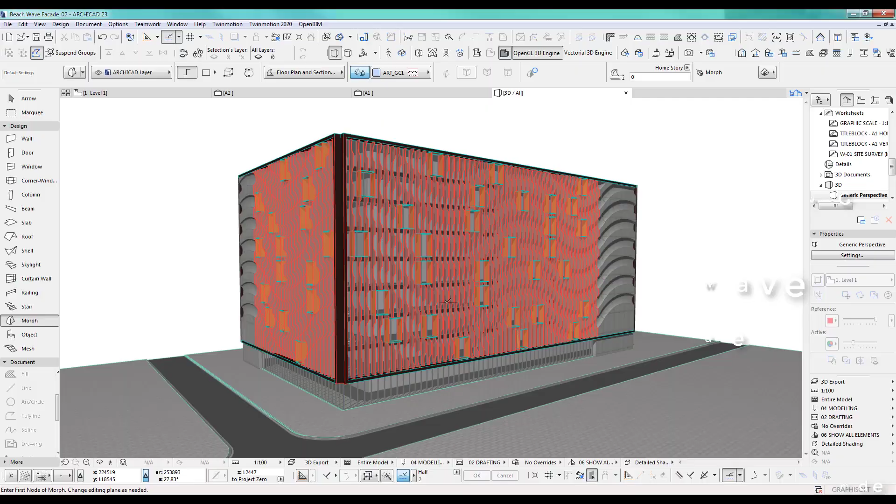Okay, so I've got my base building here. Let's have a look in 3D. So that's very simple - it's an office building, and what I did is I made a frame around, just used some columns and beams for those ones and a bit of concrete, and the rest you can see is just windows.

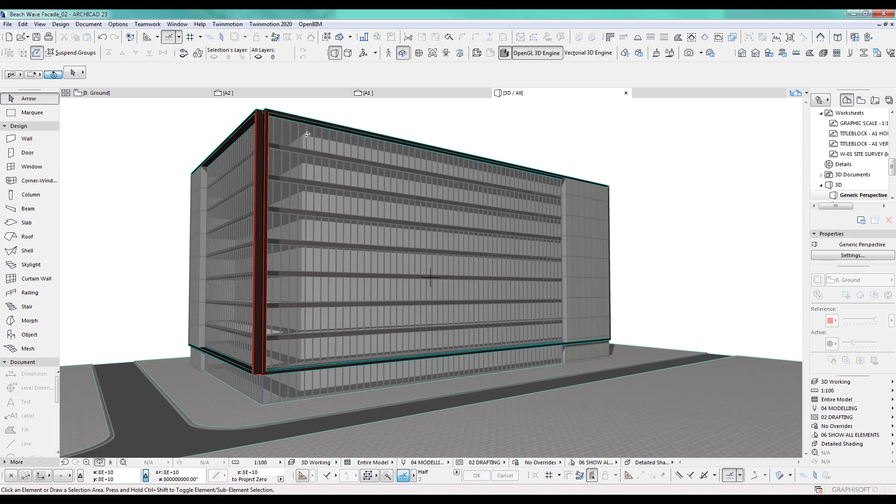Great, so if I now go and start doing my blades, which are vertical down, I will use columns for this. So let's get back to our 2D drawing, ground floor, and I like to start in level 1 because if I go to my elevation, you see ground floor level 1, I want to start the blades up here.

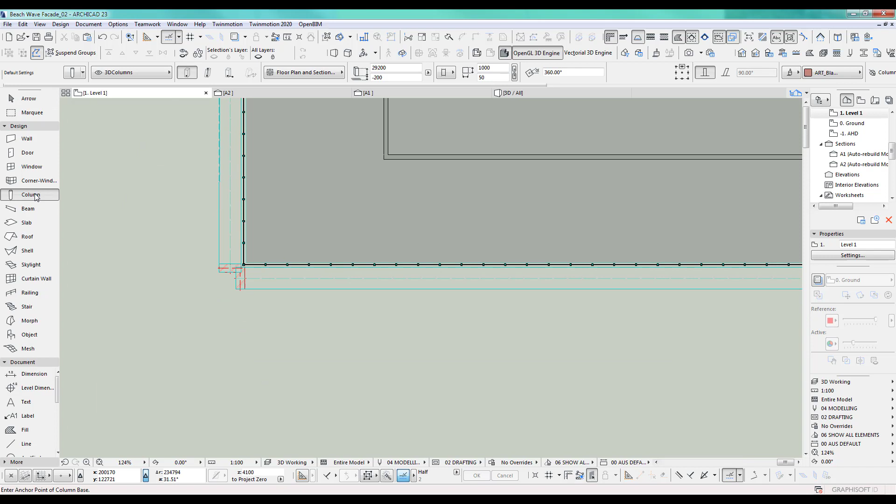So go back and we just place the first blade. For this I go and open the column tool. I got some very simple settings - it's 1 meter in length, 50 wide, and I added just material, and I'll put this on 3D columns.

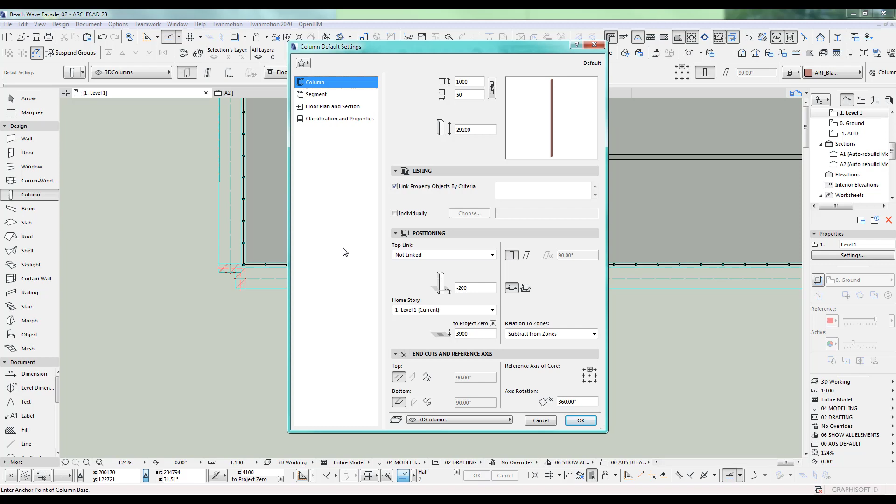The height at the moment, don't worry, we'll do this in 3D, and also where we place it in regards to the RL level. Click OK and just place it out here, and then we take this and we move it closer to our window frames.

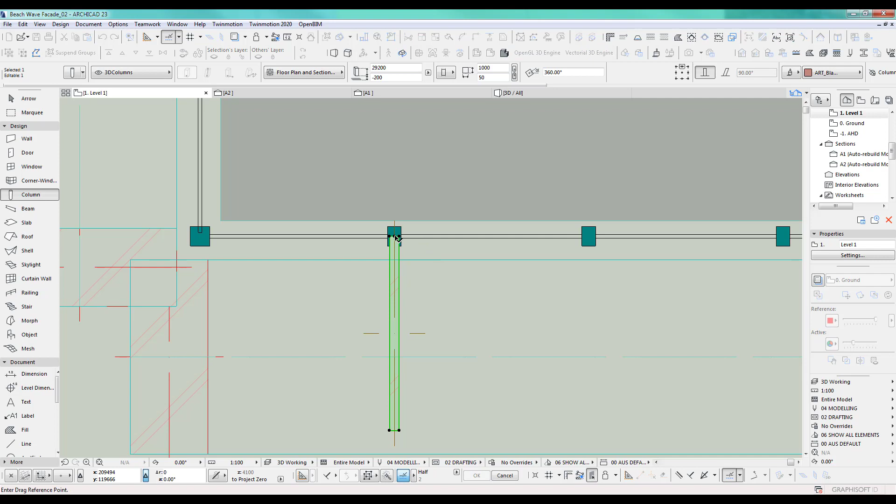So I drag this, there we go, take the middle, and I want to put it in the middle of the frame. There we go, and now we have to move it out again. So I drag it out to there, and let me check in 3D if that is correct.

All right, let's zoom in, move around a bit. Yeah, that's good. And let's go up. Yeah, now look, the length fits, lucky because I've obviously tested this one before and that was just a default setting.

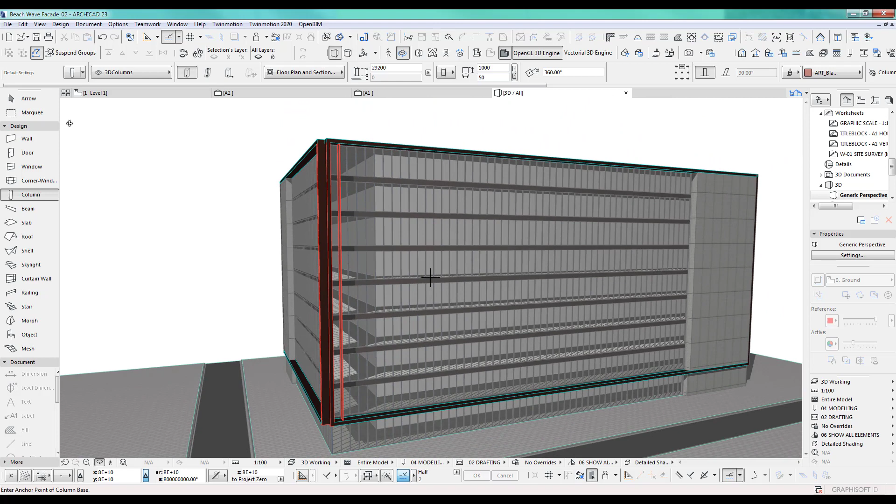But in your case, let's just say you have the column in there and it is just a little bit too small, and it sort of sits anywhere in here. Just drag them up and down to fit here the bottom, and you fit the top there. So I undo this step and I've got my first blade in.

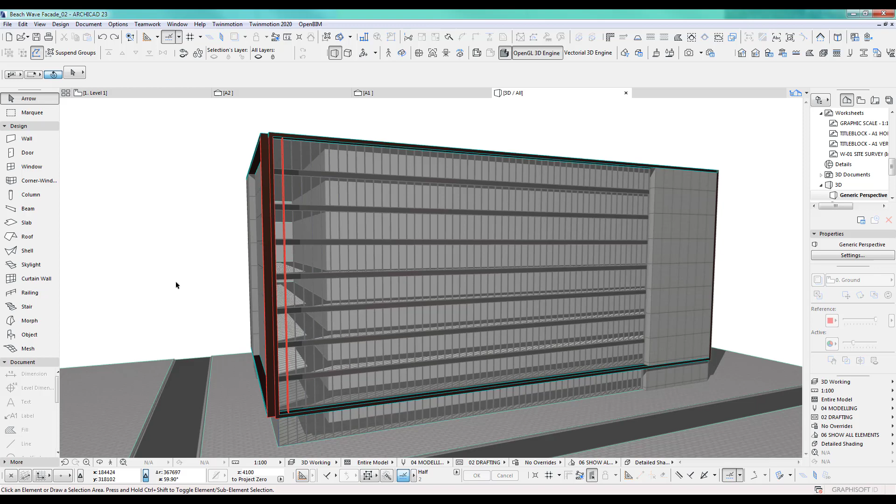Now let's just duplicate the blades this way. For this I'm going to my ground floor, and all you do is you select and we use the increment and spread tool because it's quite simple. I can just click OK, and I'm going in the middle here, from there to the middle there, click again, and now I can just spread them along.

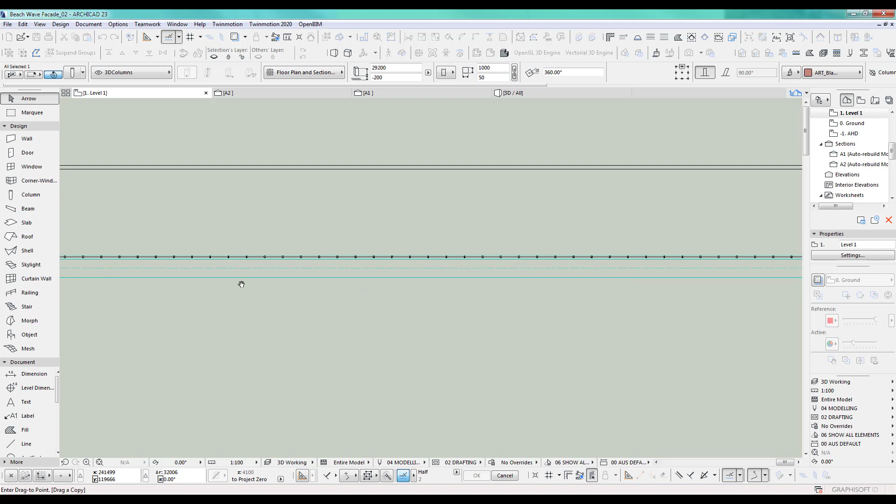Now I can see I should have shown the ground floor because I don't know exactly now where my concrete wall is starting at the bottom, but that's cool. Let's just do roughly here, and I will still select the last one and group them now. So they're grouped, and if I show now the ground floor, let's see how we did.

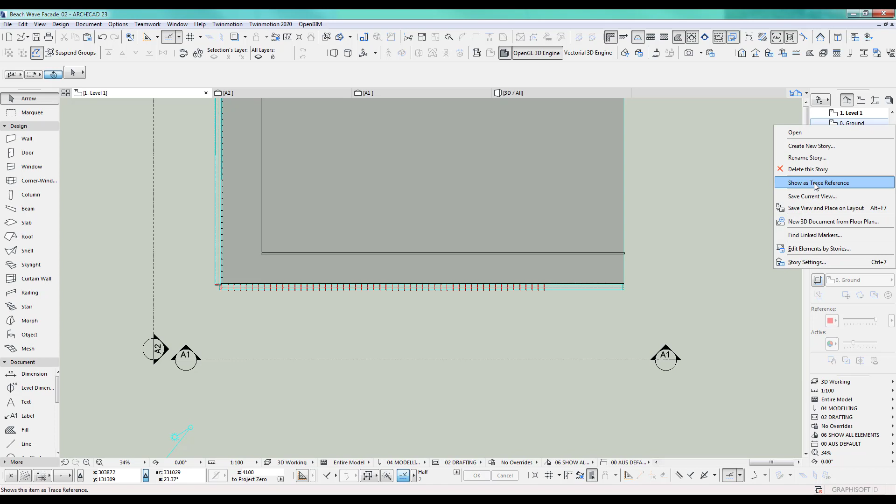Okay, oh, this is crazy, nice. This fits exactly. I don't even have to delete any blades or add any blades. Yes, sometimes you get lucky. All right, so we got those blades here. Let's do the same for the other side.

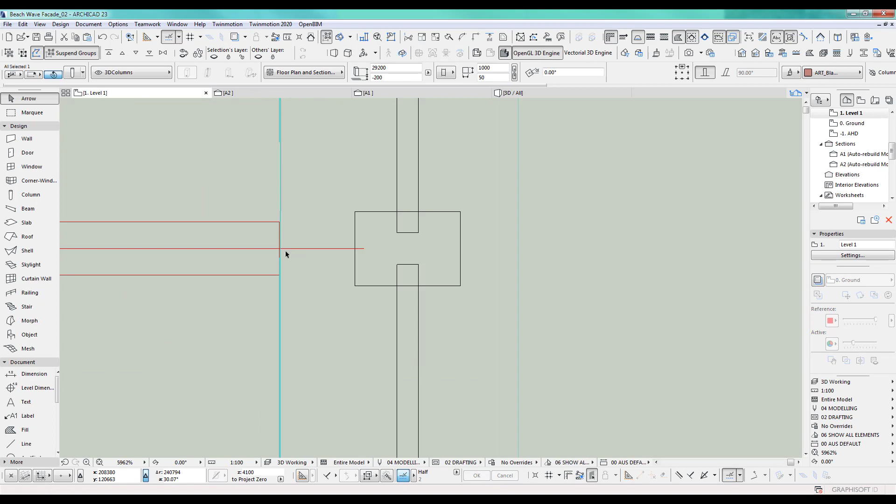Great, so we got the blades. Let's go and have a look in 3D how they look for now. Yeah, that looks exactly how I wanted it to look.

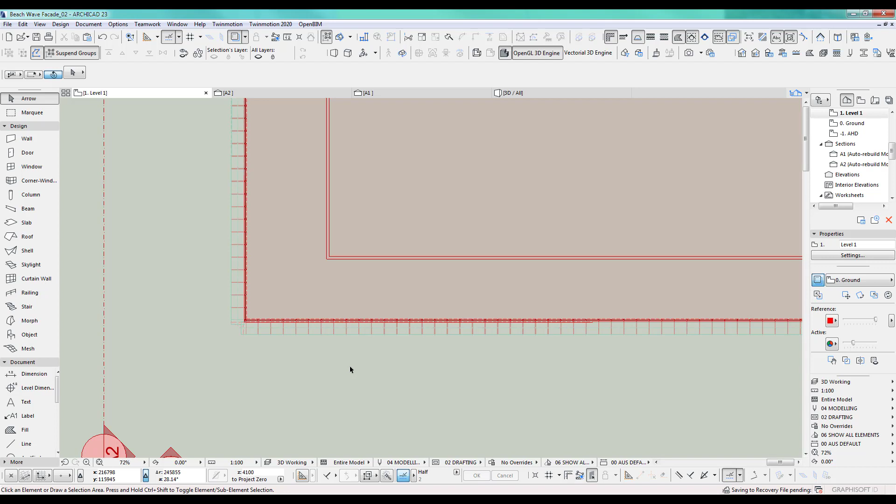The next bit is I like to add now the window sizes. Let's go back and we draw for these beams first. And what I do is, let's open the beam. I do 50 thickness and 1 meter in depth because 1 meter out and the other blades vertical are 50 - so that's the same settings really, but it's going horizontal. And for this one, I change the color to blade 01 and I put it on.

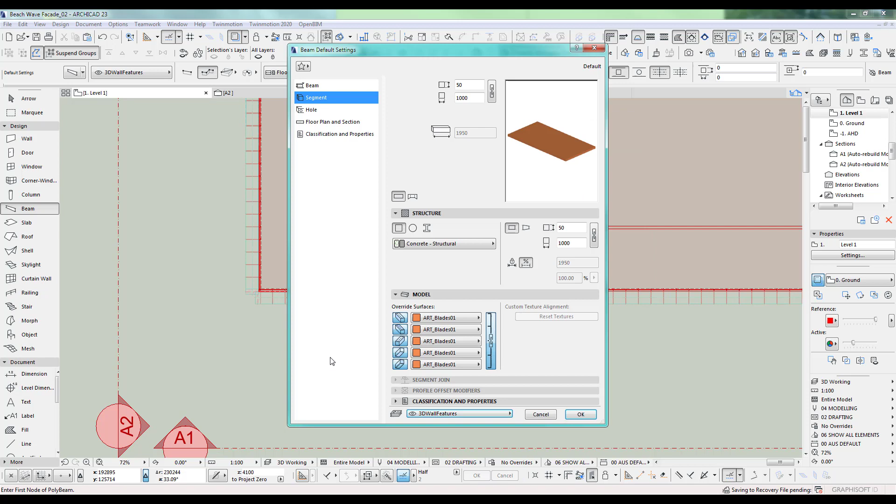Yeah, look, this is fine for that. I just need it on a different layer to the column. You will see later why. Wall features is fine, I'll leave it there. Click OK, and we draw our first blade.

This I want to go from there to there. Again, I haven't looked at the height, so let's have a look in 3D. I'll be in here somewhere. There we go, see, there it is. I should really have drawn it out here.

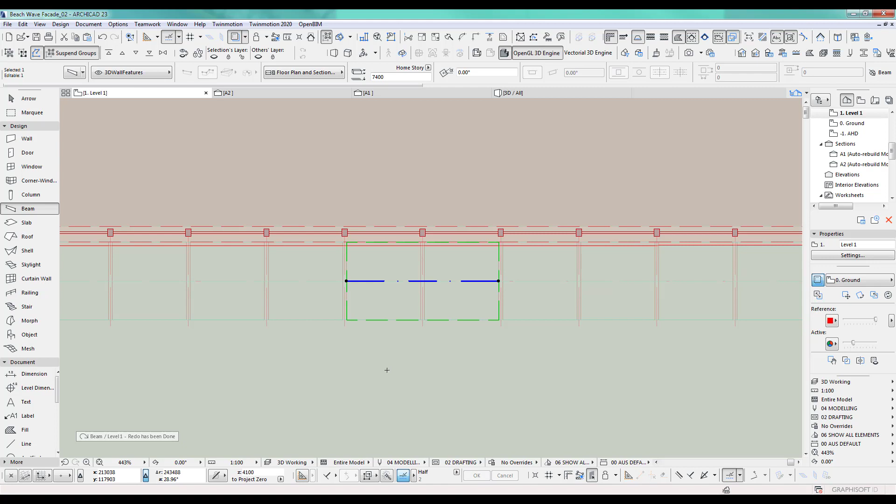So let's undo the step and redo. What happens is it will reselect it, so I know where it is. And I like to drag it out here on purpose, just really out here.

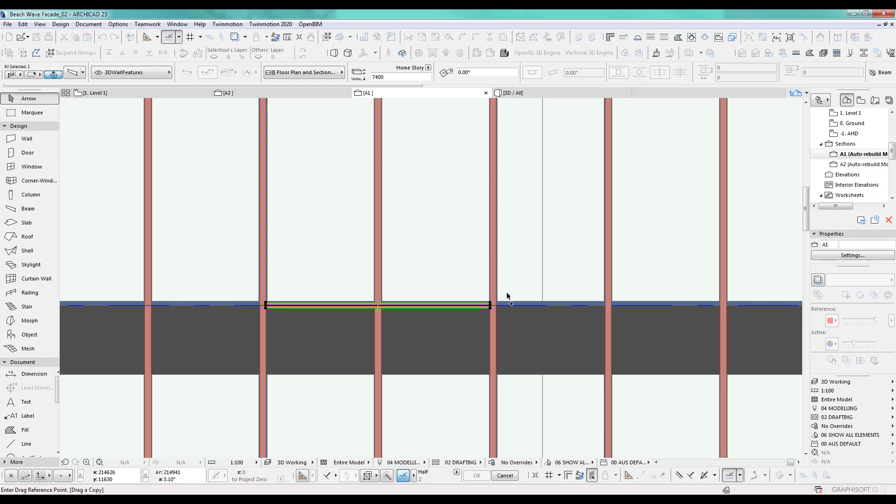Now I'm going to my elevation. Okay, so yes, there it is. What I want to do is here, I want to select this now and drag a copy, because in elevation it's quite easy done now. So I take it from here and I want to take it all the way to there.

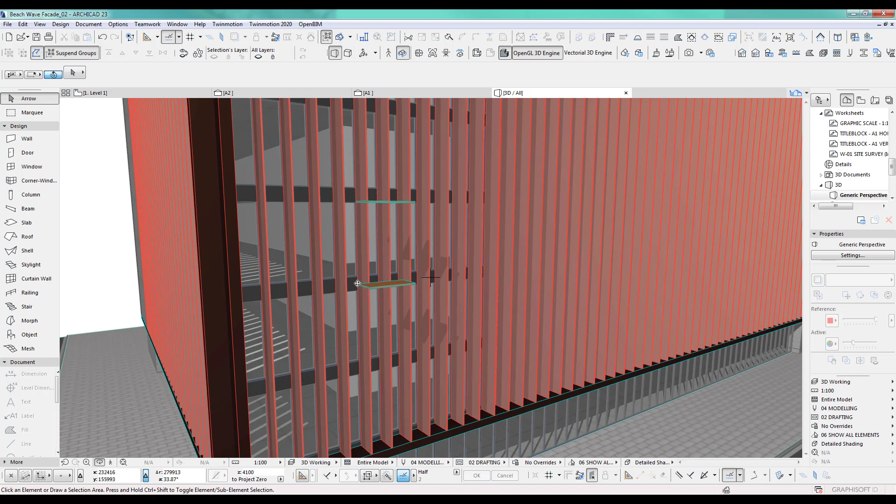Okay, so that's great. If I go back and look in 3D, we got this floating on here, which is fine. And I want to add some vertical blades. You will see why I do this, okay, so just be patient with me. I know I got vertical blades already here, but there's a reason I'm doing this again - this has to do with some of the solid element operation we will be doing.

Okay, so I go out here and let's just add a column again.

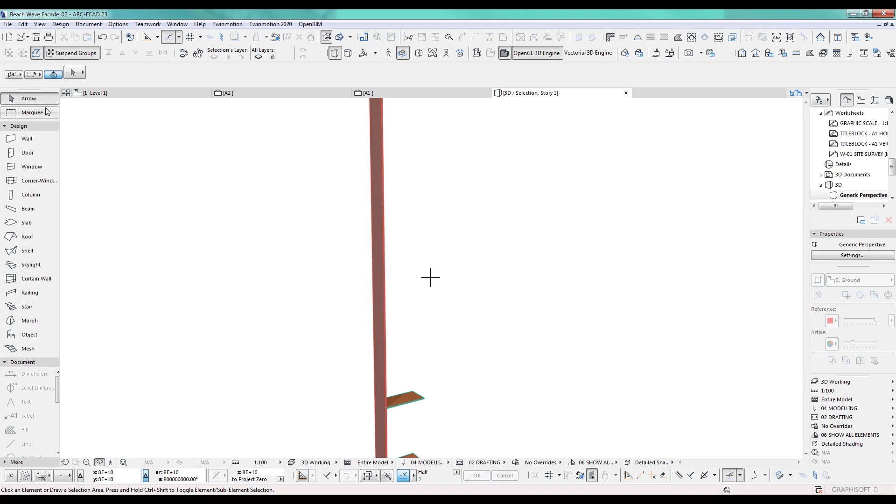Let's click them in and drag there. So they fit obviously exactly there. And just before I copy that, I want to change the height. So let's just go here and drag this down. Great, this is good. Now I want to change them also to blade 1, so they got the same color.

Now I can - okay, that disappeared. Let's go up and up again, down again. I lost it now. Great.

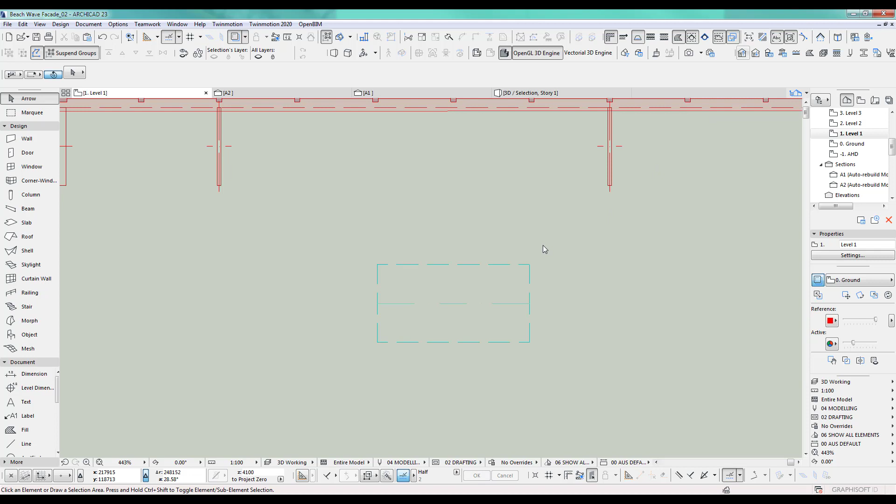Okay, let's go back into 3D. I didn't tell it to show on all levels. Let's have a quick look. Where are we here? Home story only. No, I want this on all stories. Okay, let's go back.

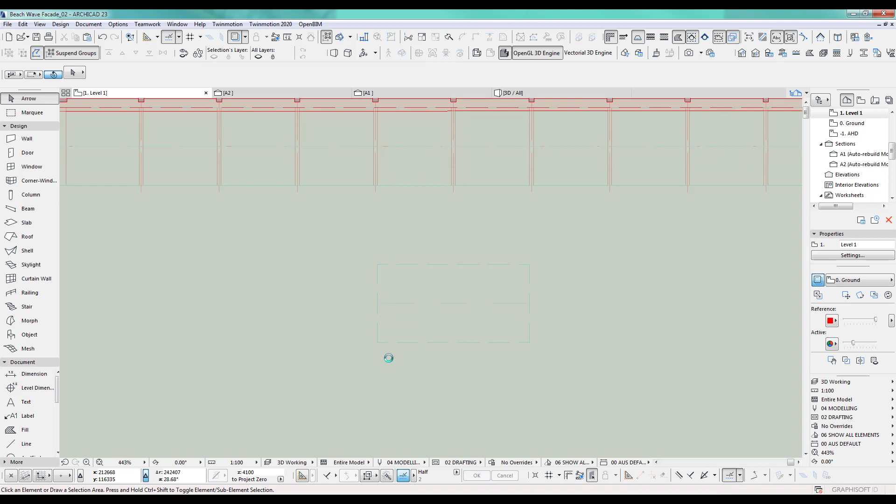Okay, that should turn up. Very interesting. Let's go up again. That's a bit odd, it says all stories.

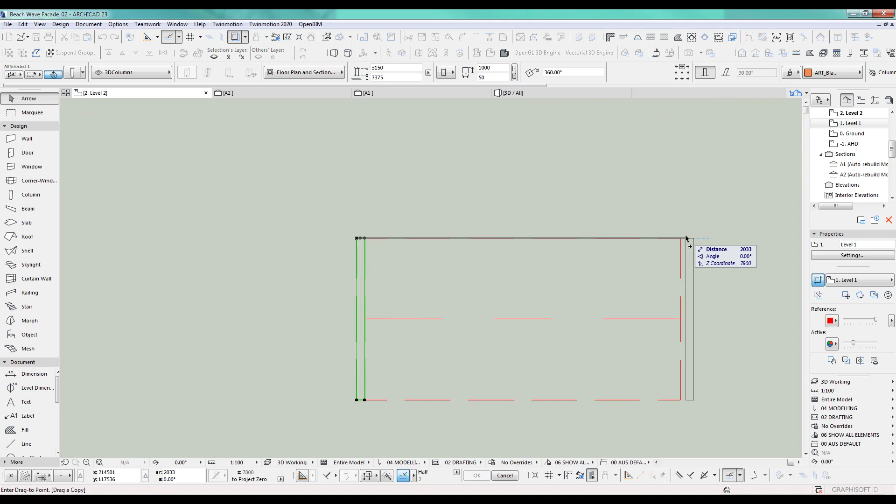Anyway, so what we do is now let's show them as trace reference, and I just drag a copy. Yeah, I'm sure there's some setting I didn't do correctly with the showing in 2D, but I'm sure you guys can figure this out.

So now I select them, go into 3D, make sure it's all selected. No, it's not - so obviously because they're not on the same floor. I'm getting there today.

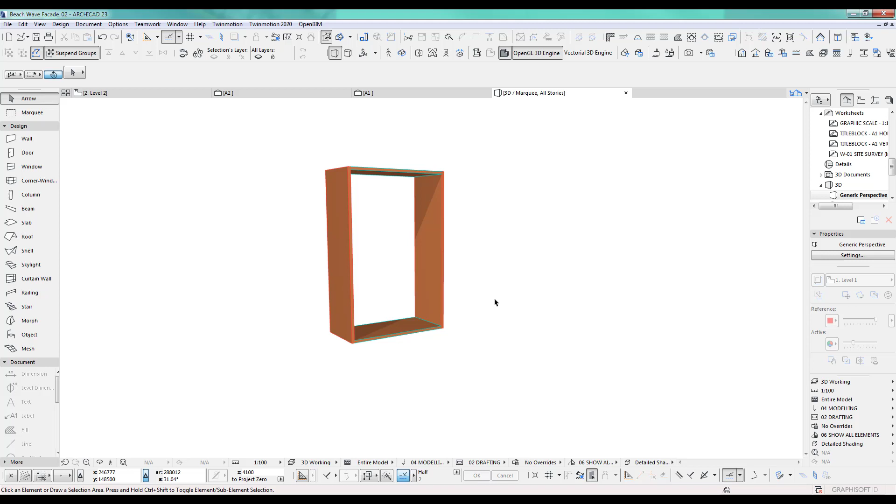All right, so take all this and we group this. Right, next step is quite an important step. What I do next is I want to draw with the slab exactly around this box. So create an extra box, and that box I will use for cutting.

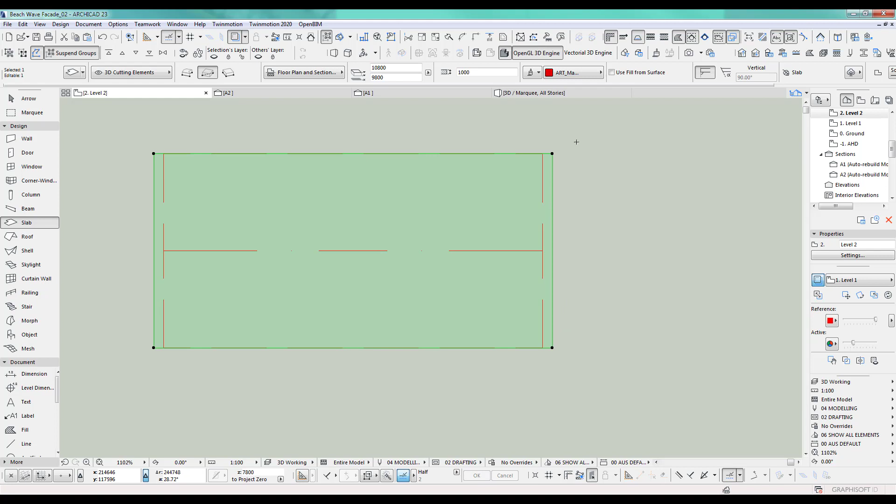So what we do is we take the slab, and again I just draw right along here. But for safety reasons with the cutting, what I do is extend this box now. Let me extend this by 1 - that'll do, distance 2. 2 is fine too, 1, 2. That's fine.

Okay, now in 3D I have to adjust this box obviously. So let's move this up, and we move this - well, extend this down. Now again, I want to extend this by 1 millimeter here.

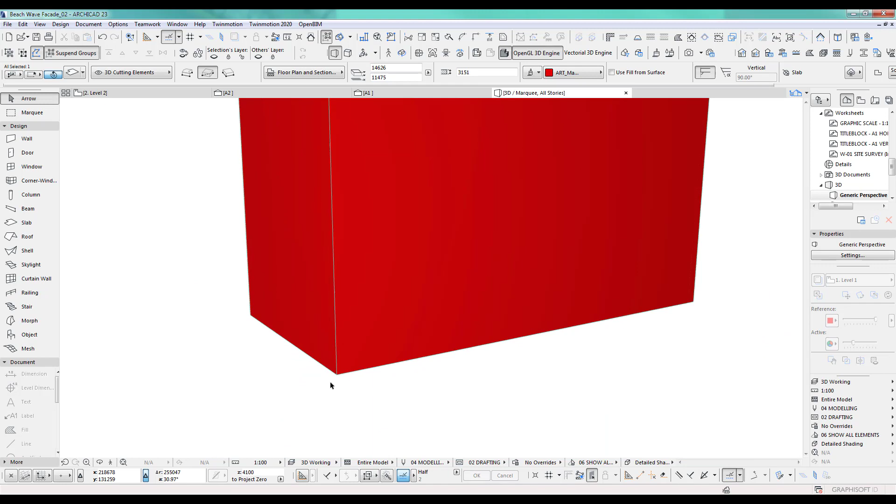So it's 3,150. So all you have to do is 3,151. Okay, so there is 1 millimeter above, and we go down here, do the same thing. So now we got 3,151, we do 3,152. Okay, so the whole box is now 1 millimeter outside your window blades.

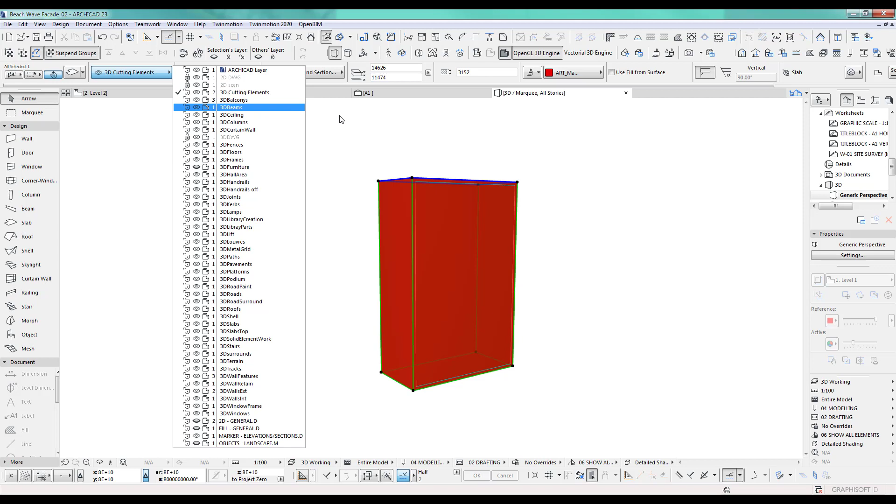Call them window blades, that's fine. This one here, material doesn't matter. See, I put them on a material called material off, and importantly, I put them on my cutting element layer. Great, so I've got this. Select everything and group again.

Okay, so if I go to my elevation now, let's see what we got. There we go. So we got this box, and this box now we will copy around randomly on this facade.

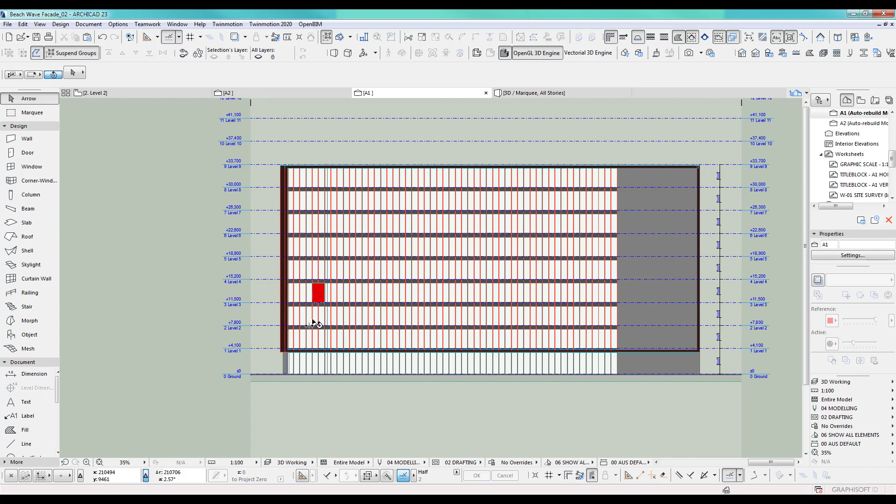So let me do this quickly. What you do is click, make sure the groups are not suspended because I want to move everything. So we zoom in a little bit.

And you can see now it is not really showing where I want it to. It's quite hard, so here's a little tip. You can go now and turn this off.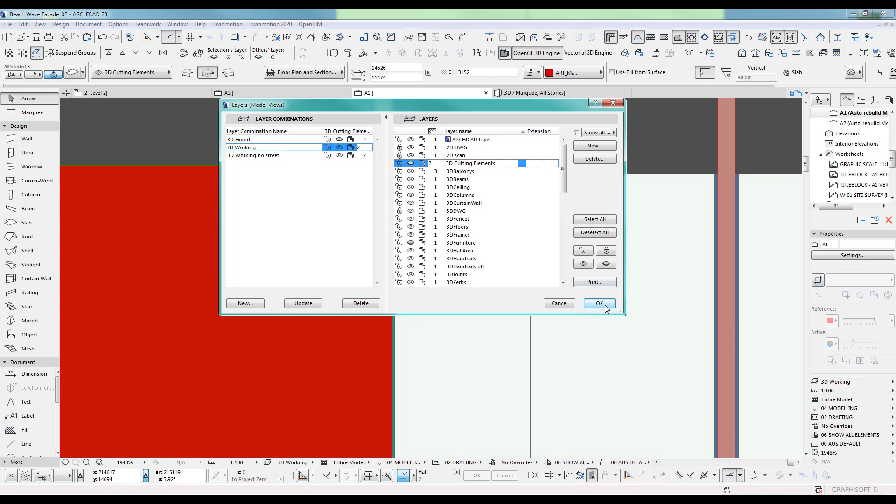Now even though the box is not shown, because it's grouped, it will copy the box. So let me select this now. See, I need to see this.

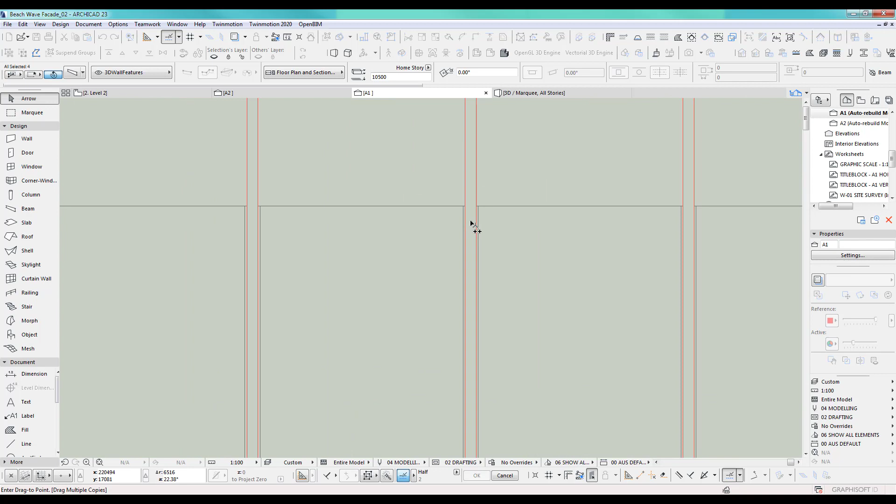Let's drag double plus, we drag copies around now. So go here, and wherever you go, make sure you zoom in, and you want to go to this corner. That's quite important that it all matches. See how it matches up on that side, and it will match up on this side with the blade. So that's important. Let me do a couple around here.

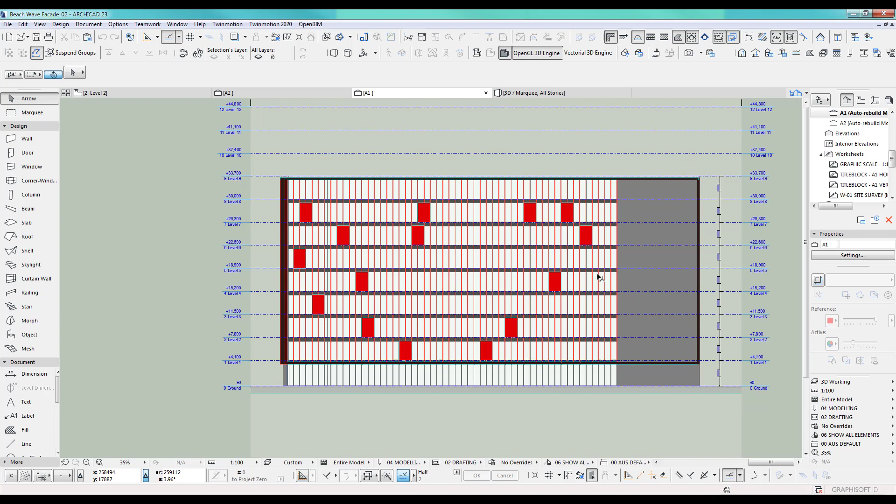Okay, now I'm not finished. It's a bit hard to see now. It's selected, that's okay, but let me put back the working layer. So that means I can see all my boxes. So there you go, it's not too bad, but I need a couple more maybe around here.

And some of them I want actually to go straight under. Okay, so let me do that now. So I'm going here, and again I will turn this layer off first and copy a couple more around.

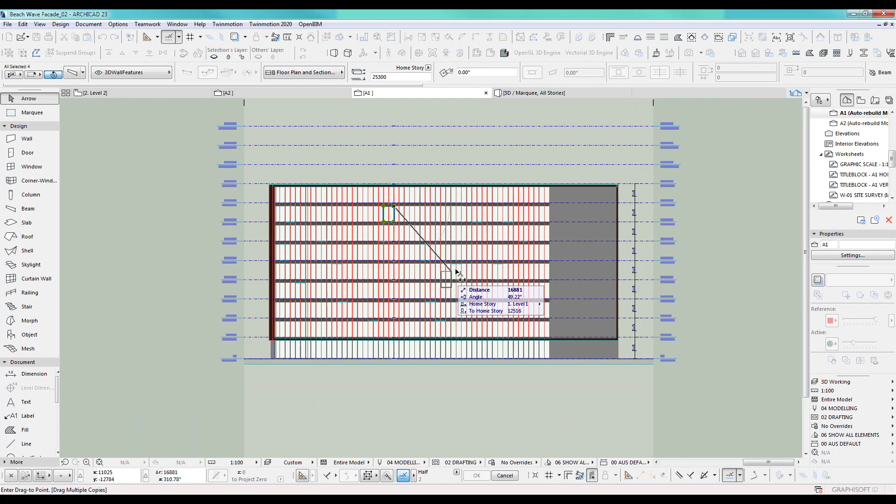Now it gets a bit hard to see, so let me do this, because you know what you have to do now. I go back to the working layer, and I will select this, and if I zoom in I can still select this one in here. I would think so - have a quick look.

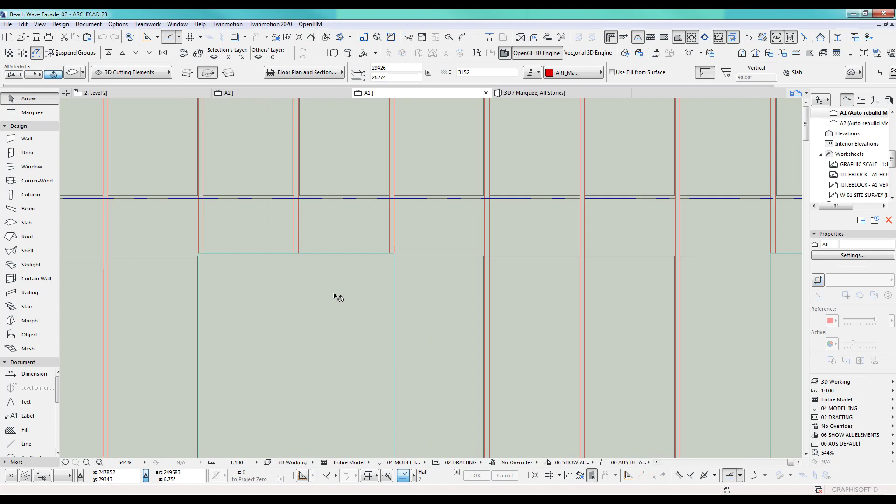No, I can't, but see, that doesn't matter. I'll show you what we do - we still start copying them, but all you do is zoom in, and you just pick this one here. See, there you go, pick this one.

Okay, I think this is pretty good. Escape. I quite like this.

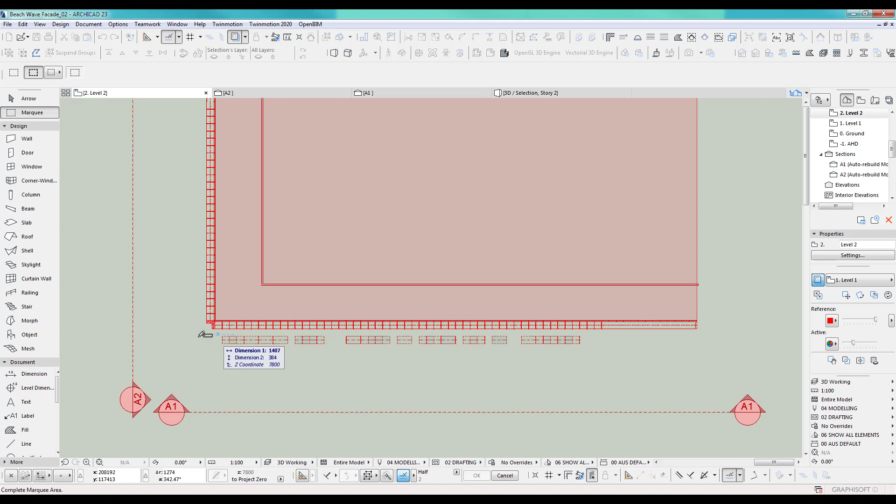Now we go back to our 2D drawing, and for this purpose of the tutorial, I really wouldn't mind copying them to that other side. So let's have a quick look. I think with the marquee tool I should be okay, so everything within the marquee tool should be mirrored and copied. Let's do this now, mirror copy, go there.

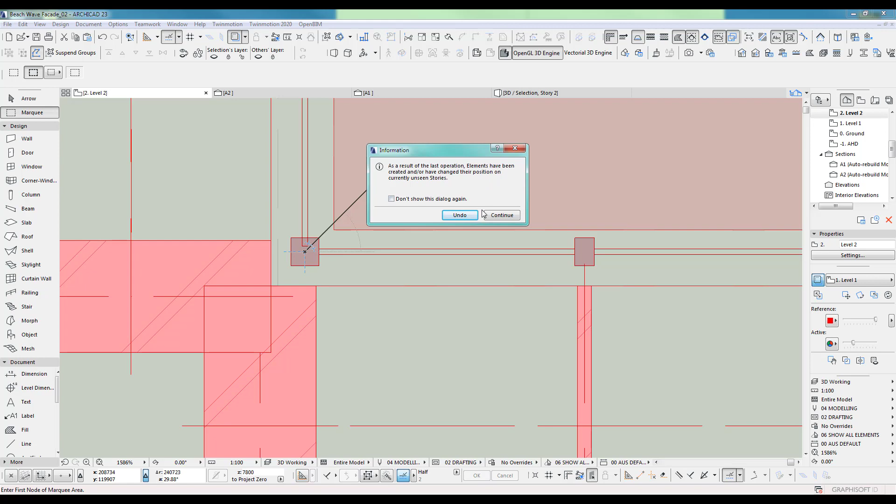Continue will ask me because some of the stuff is obviously in unseen stories, so I'll continue. Let's have a look. Yeah, there we go, that seemed to have worked fine. So everything within the marquee tool of all the different stories did copy mirror in this case. Let's have a quick look, yeah, see, there you go.

Now you see at the moment this looks mirrored, so to make sure that doesn't look exactly the same again, use the marquee tool, and I will just rotate this roughly from about here, and you go all the way around here. Let's have a look, yeah, so it doesn't look exactly the same.

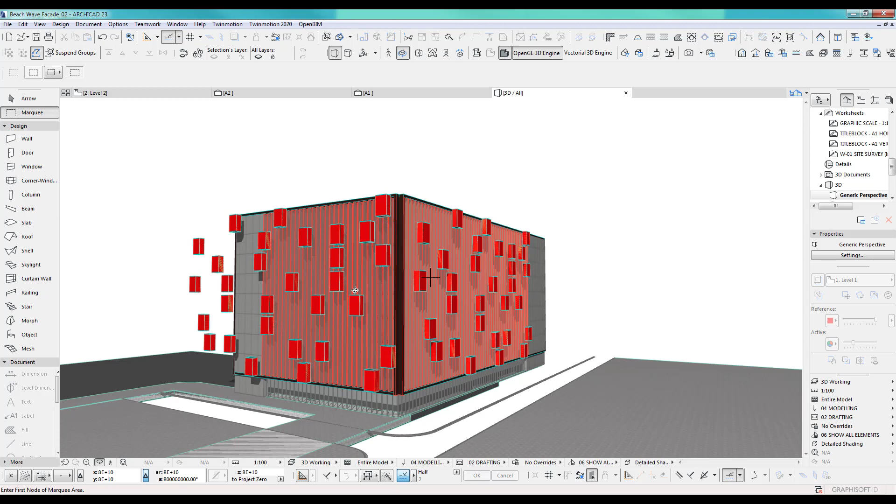I know it looks the same back here and back here, but because I will move it a little bit in a moment, it will be fine. So, 1, 2, yeah okay cool. So let me move this. Yeah I think that will do. So let me delete those.

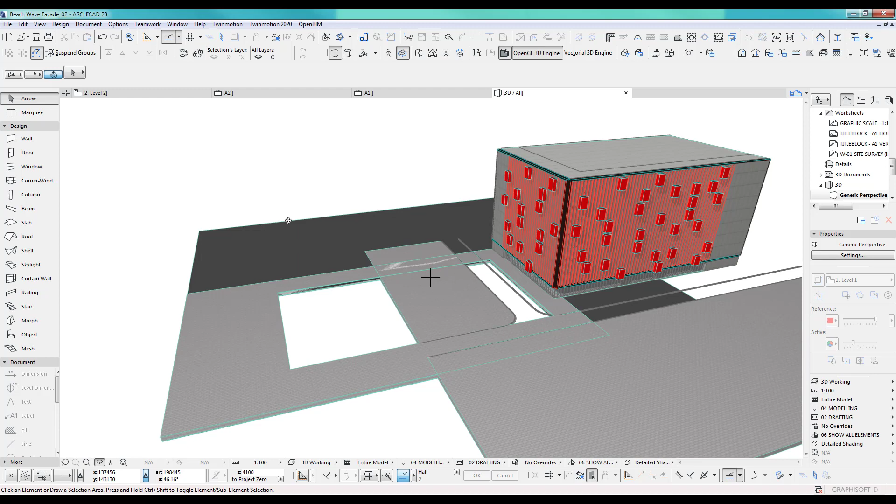Oh look at this, so you gotta be careful. I moved, because of the marquee tool, I moved all this down here. Let me fix that up quickly. See, again, I sometimes don't mind this happens in the tutorial. There you go, back in business. So be careful if you use the marquee tool, but it does work. You can just turn those layers off before you do what I did.

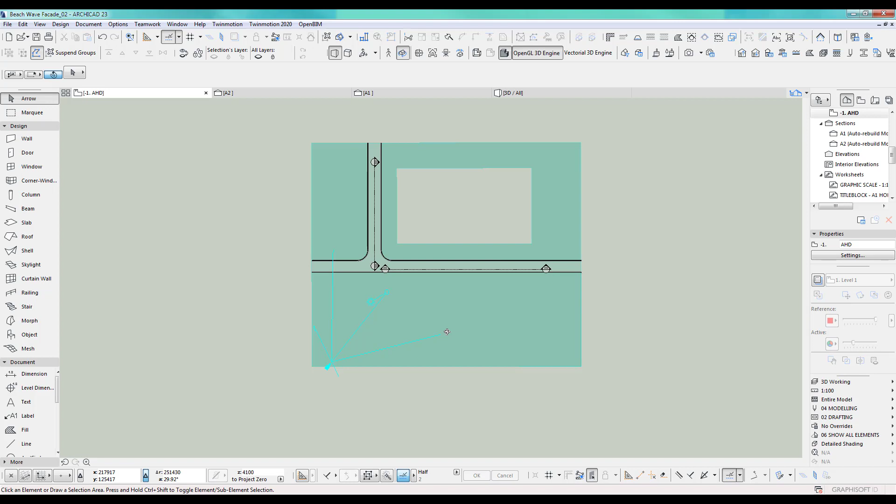Great, now next bit is to move them closer. Let's go up a level. There we go, and I move them in. Yeah that's it. Now I want to move all those ones in, obviously. So to do this and make sure we grab them all, what we do is, let's have a quick look.

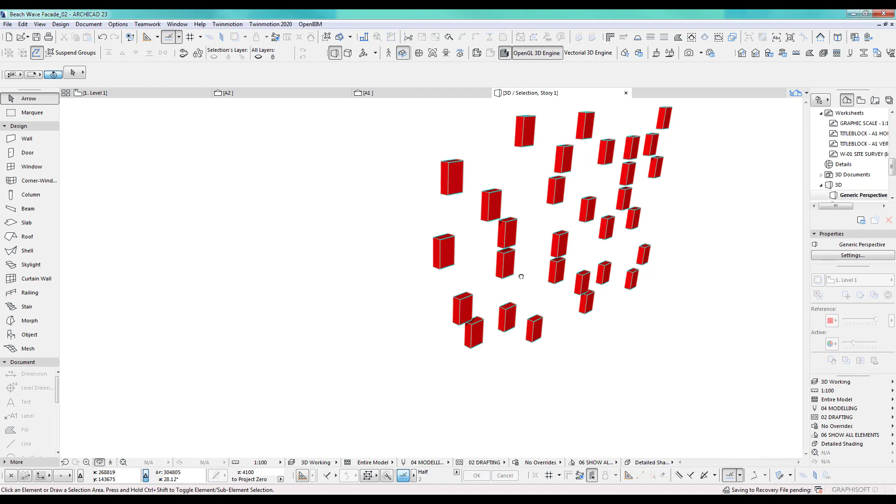Because I told the column to show in all stories, it should grab them all, but just make sure. Let's have a look. Yeah, that looks good to me. So it does grab them all now, which is great, and I move this in.

So drag, and you can see you got the middle of the beam here. So take the middle of the beam and you move the middle of the beam right there. Again, check in 3D what's happening. Yep, they are right where I want them.

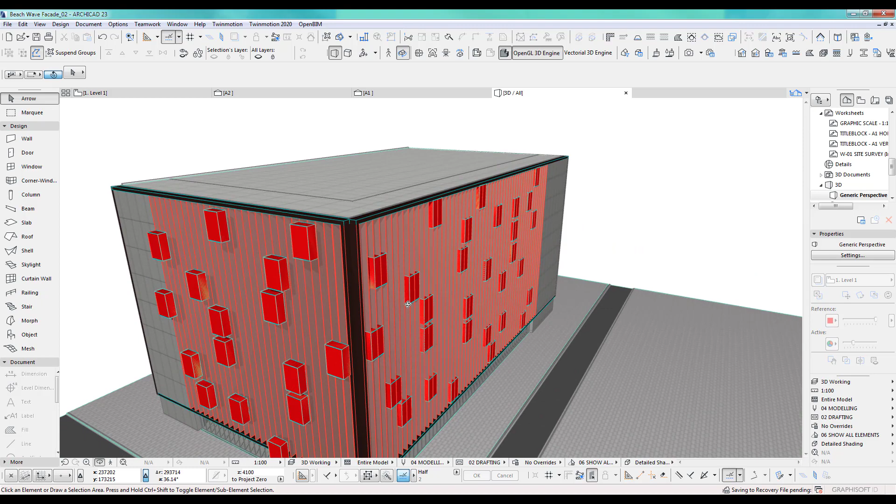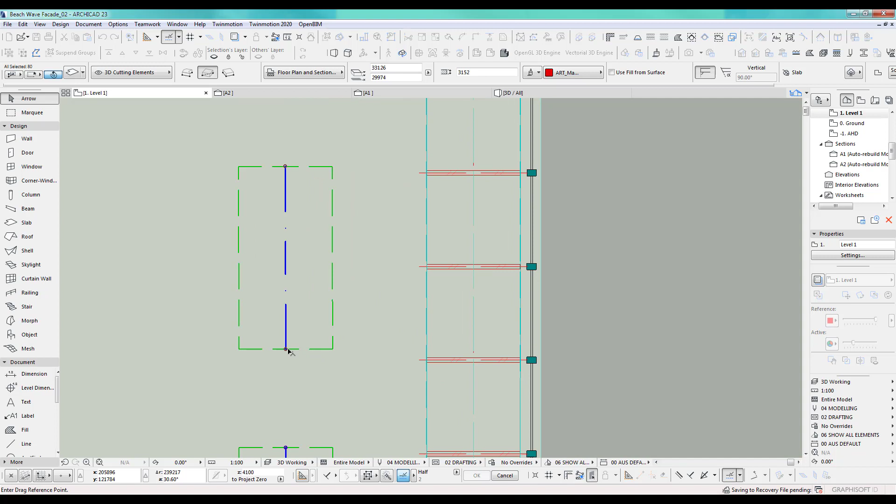Next bit is we go back and we do the same with this. Now this one here, I have to be careful because it doesn't fit at the moment, and also I can't see any, well, because it's grouped, it should work. Let's just drag them, they have to go, let's just take this one and we go there, so they should be in between.

Let's have a quick look. Yeah, everything moved, that's fine. Actually, I don't like this box right there, so let me move this box in a minute. This one too, all right cool.

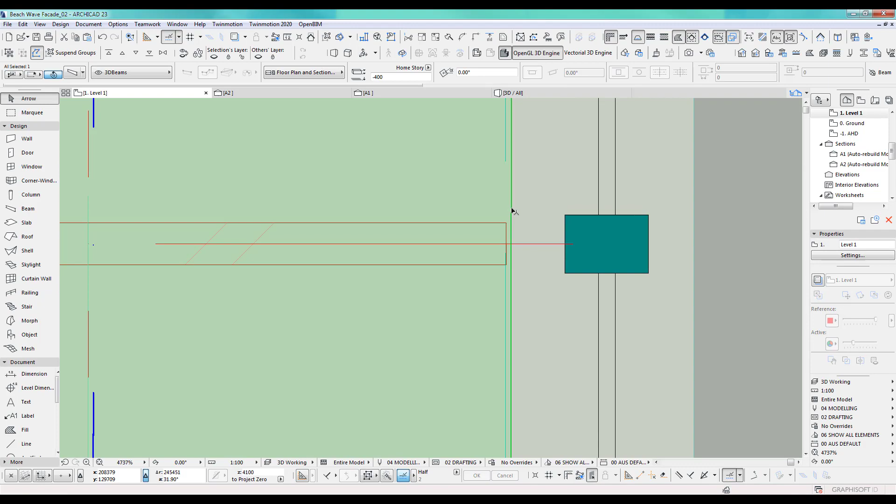Now how do we cut this? What we do is we actually do the solid element operation, as you know, but what we do is I like to only cut with the red box. So how do we do this? I'll show you, so we go in here and open the solid element operation.

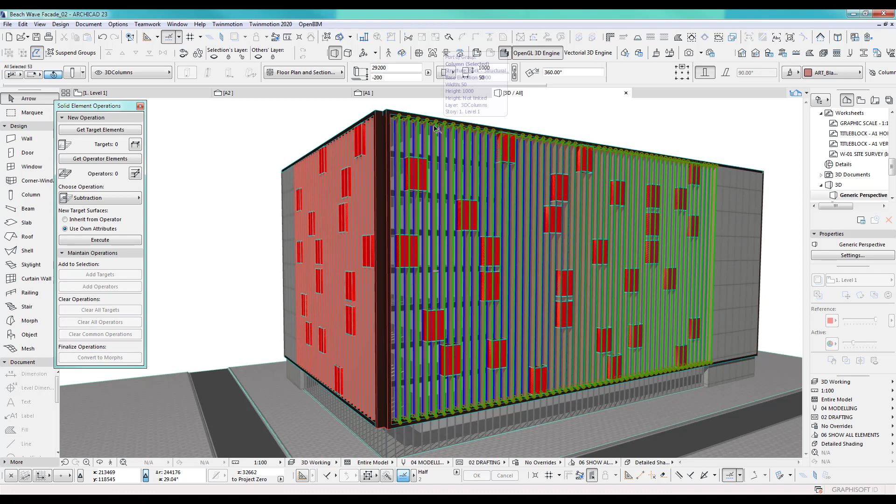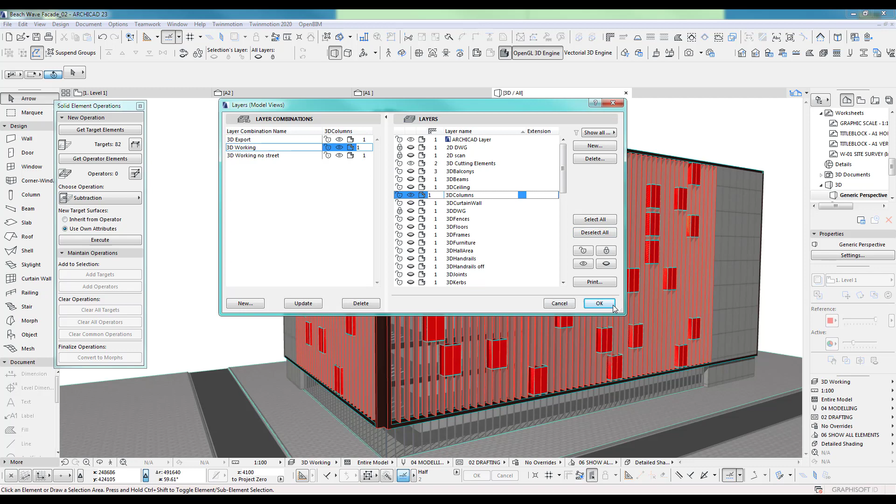I like to get my target elements first, so I take those ones and those ones as target, and I like to add all those boxes now. The best way to do this is actually turn all the layers off apart from those two. So let's just select all, deselect, and we have cutting elements and the columns. Okay, so that's fine.

And what we do is now we go to the slab, select all slabs, and we go to operator, and we do a subtraction, execute. All right, let's have a look what happens here.

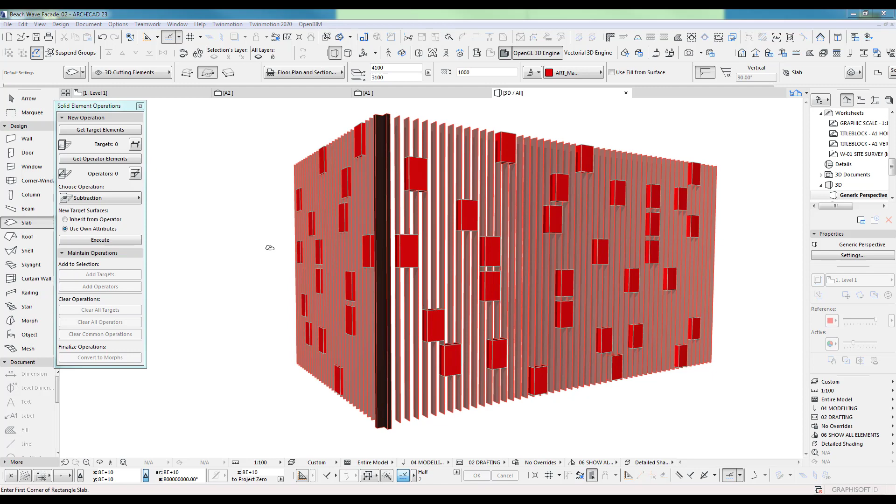So if I go here and turn this off, that's what we got. Okay, so I can now turn back on everything. Let's go 3D export, so I turn this cutting element layer off. Let's see what happens. There we go, beautiful, so they all cut out nicely. Yeah, that worked pretty well.

Now how do we add our wave in there? For this, let's go to our section. I did add a wave, I tucked it away up here, by simply using some arcs. You can use the spline, I have tried it and it had some problems with, I'll show you in a moment, the cutting of my...

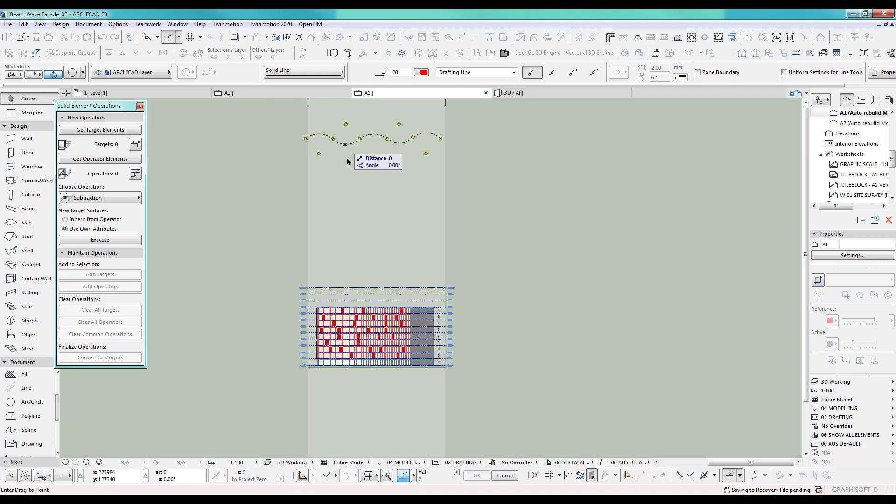Profile. Okay, so I'll show you what I did, and if you feel like you want to try it out with the spline, please do, you might get it working. So let's drag this down, and I want to drag this down here, in the middle there, and now let's copy some of those waves up to show you how it will look. Let's just drag them up. I've got, you see, I've got 3700.

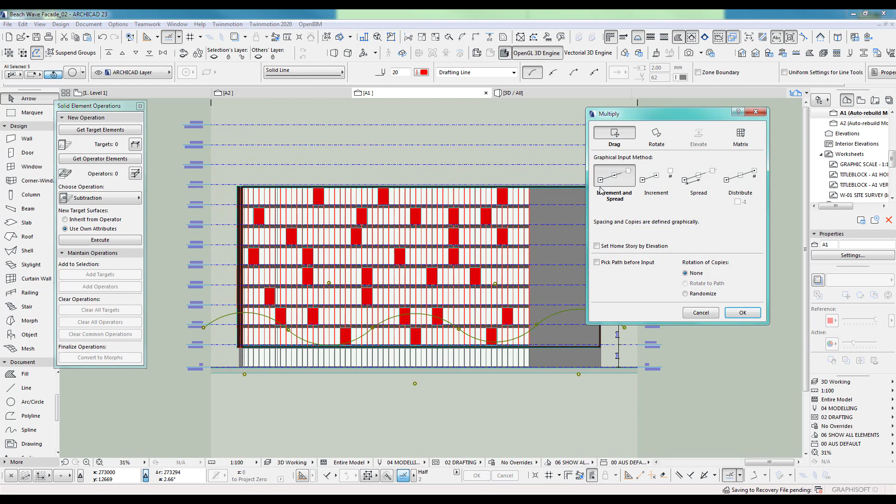Okay, so what I do is we go in here again, use that one, and I go from there to there, 37, and let's just copy a couple up, or more. Okay so we don't need all those, you've seen them all, but I want to show you how it looks, because that's what I want to achieve now. I take one of those and I copy.

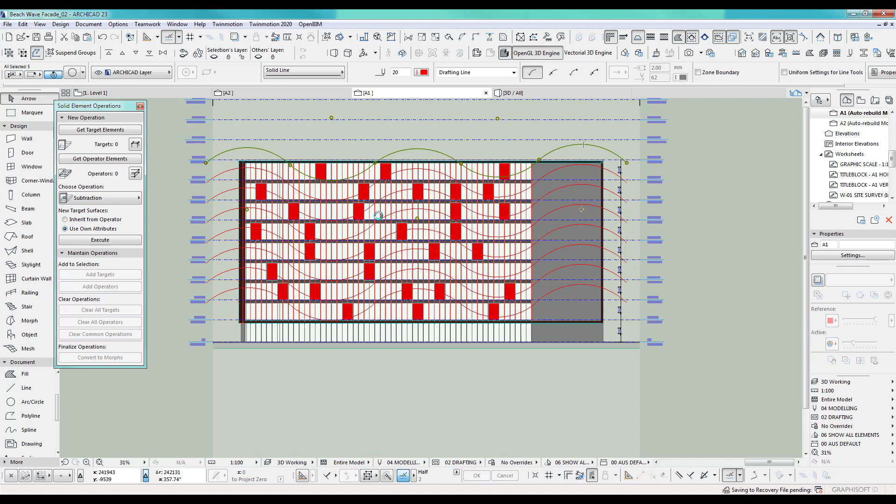Let me undo the step now, because we really don't need it. And I go back and place this down here, just paste it in.

Original location, paste. Let's see where it goes. Down here, that's fine. And we move it up a bit.

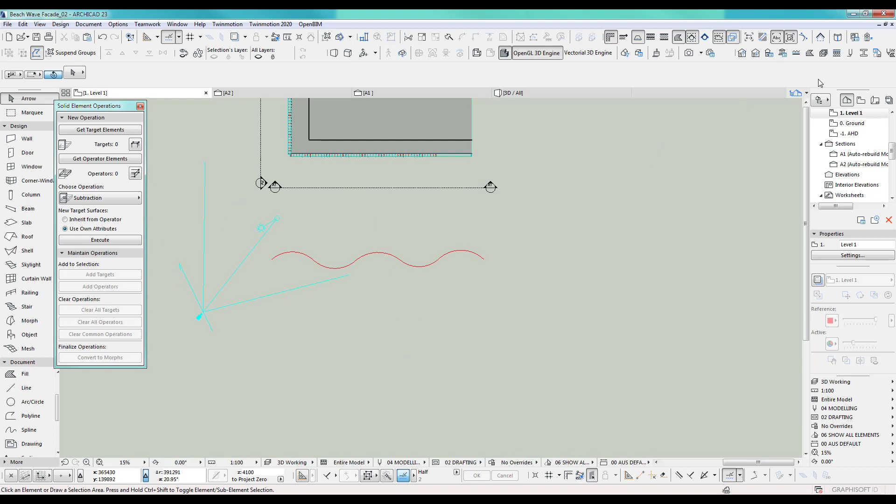Now I created a profile, I called it wave, and all I did is an ellipse. It's a fill, 2 meters by 1 meter, and I will use it from the middle, using only half of this. Okay, I saved it as a wall.

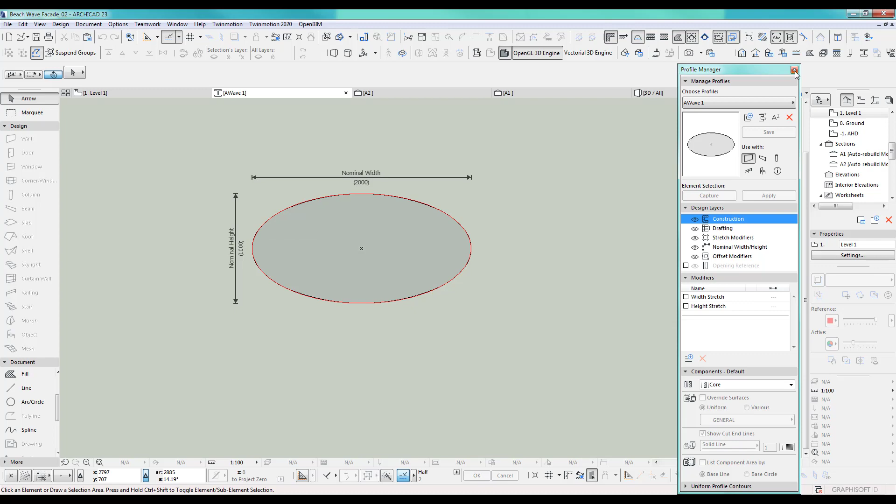Let's get out of here. We go now to the wall and choose our wave, go from here to here, material off because I don't need it, and cutting elements. So I click OK. Don't worry about the height, we will do this in a moment, and use space click to add that wave. Let's have a quick look in 3D how our wave is looking.

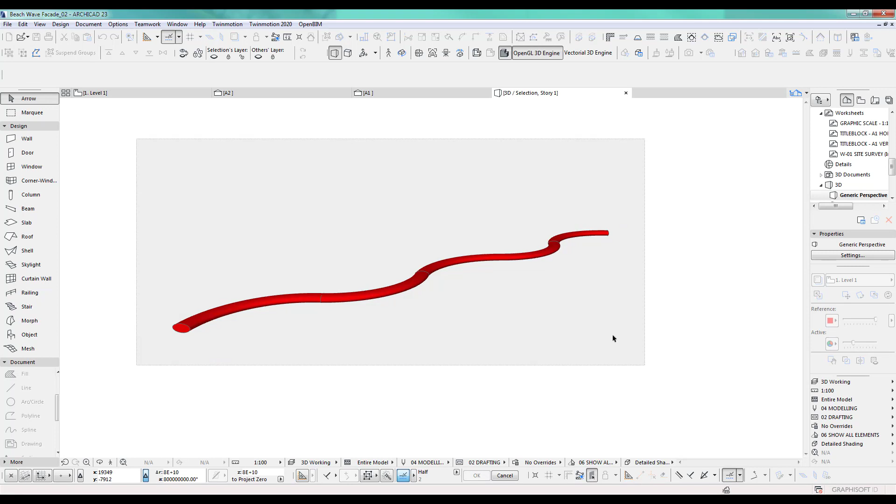Nice, see, that's the first wave we got here. Now what we have to do is select this and convert this to a morph. The reason is I have to rotate it in 3D. Okay, continue anyway.

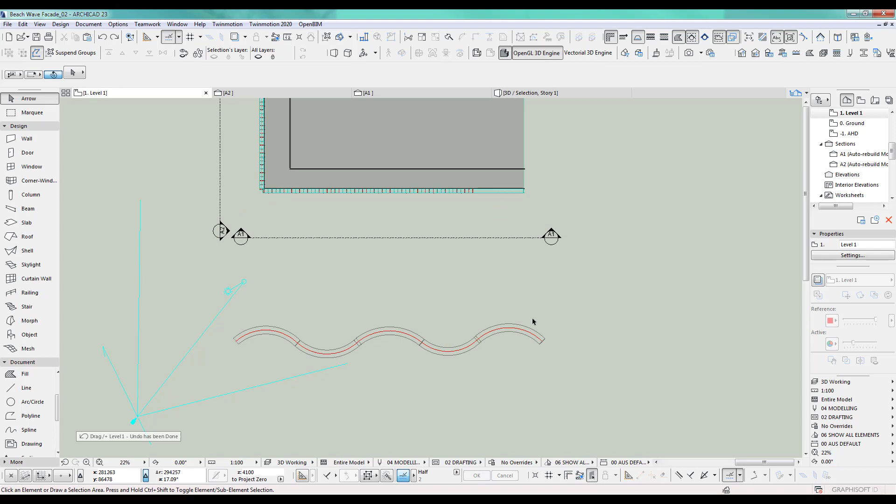Let's go down here and move this up a little bit into my A2 elevation, otherwise I can't see it. So let's just go roughly there. Yeah, not with that one, that was very good. I want the morph, there we go.

So now in A2, if I go there, I will be able to see this morph and I can rotate it. Go in, make sure the groups are not suspended. So select and we rotate, and you just rotate this around. There we go.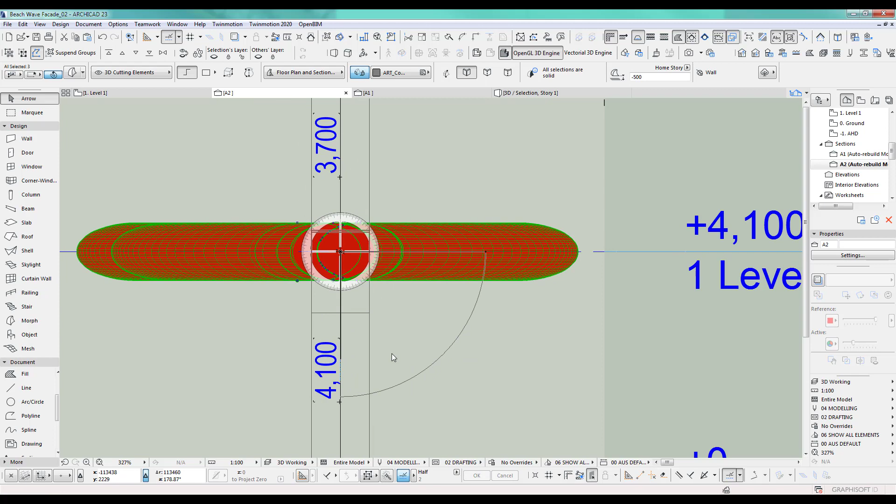Now important is you want to move it in, but let's go to A1 to move it up. There we go, we got this there. And we just roughly - since it's design phase - go in the middle here and roughly go there.

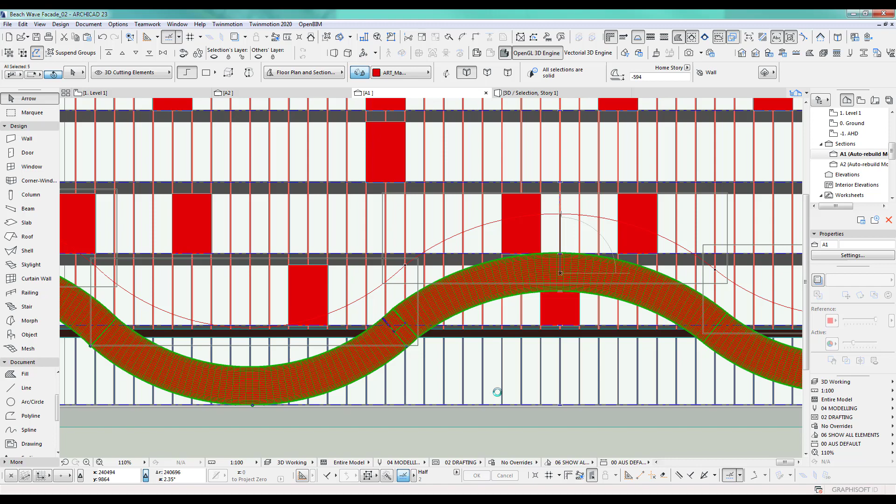Let's copy a couple up. So you do this again, increment and spread, and now it's 3700 from floor to floor. Go there and we go up and do a couple. Very nice. Let's go and have a look in 3D.

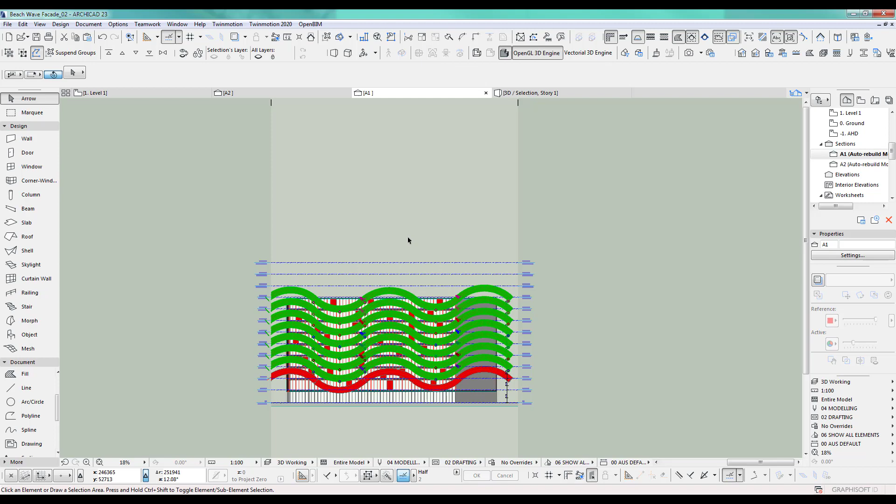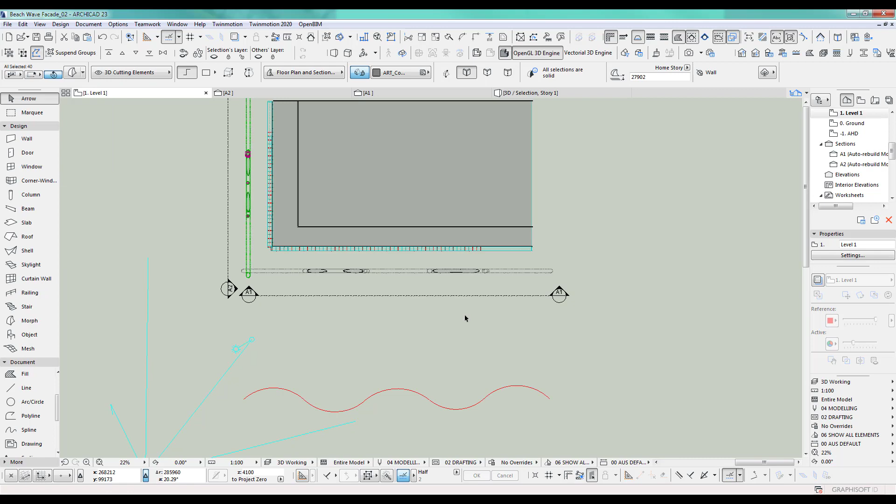Yes, looking great. Okay, now before I move it in, I will mirror copy because I want this on the other side too. Now this one here is the first one we move in because, just like I said, from the middle of the ellipse, I want to cut off those blades.

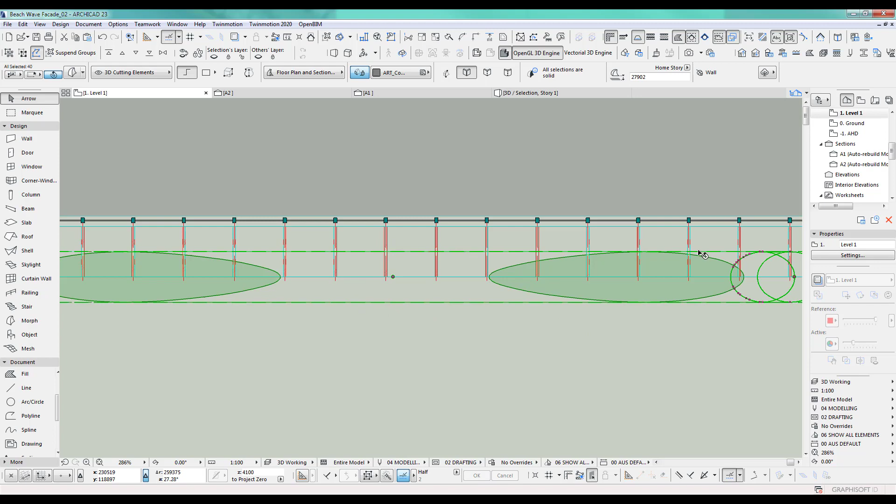So you drag, just go from the middle and you go there. So the other half of the ellipse will not cut off the blades, and this half will be cutting off. The same we do with this one here.

I think the effect will be pretty cool. So let's go into 3D and do this now.

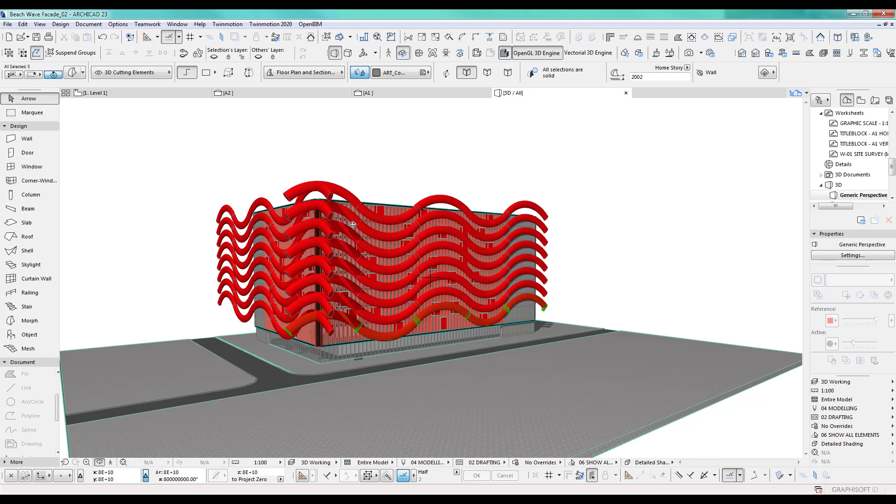I only need a couple layers. The layers I need is obviously the cutting element, that's fine. I want the layer for the blades, only the blades, not the windows. See, that's why I created this, because what I want to cut now is I don't want to cut any of the window frames. I want to cut only the blades. That's the reason I did this extra.

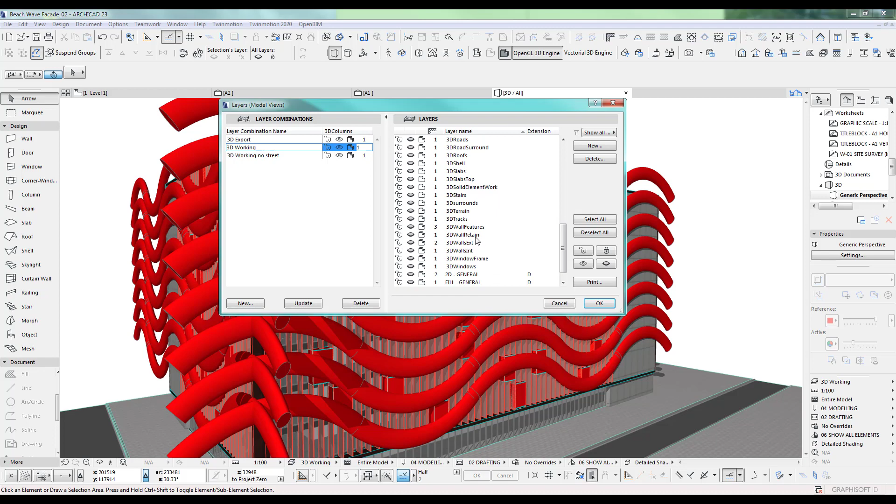So let's go. So we need the blades, we need the 3D cutting elements, and I actually like to also cut this into the concrete. So the concrete is on walls external. All right, so those three layers I like to turn on: cutting elements, columns, and 3D wall external. It's just easier to work like that if you turn some layers on and off.

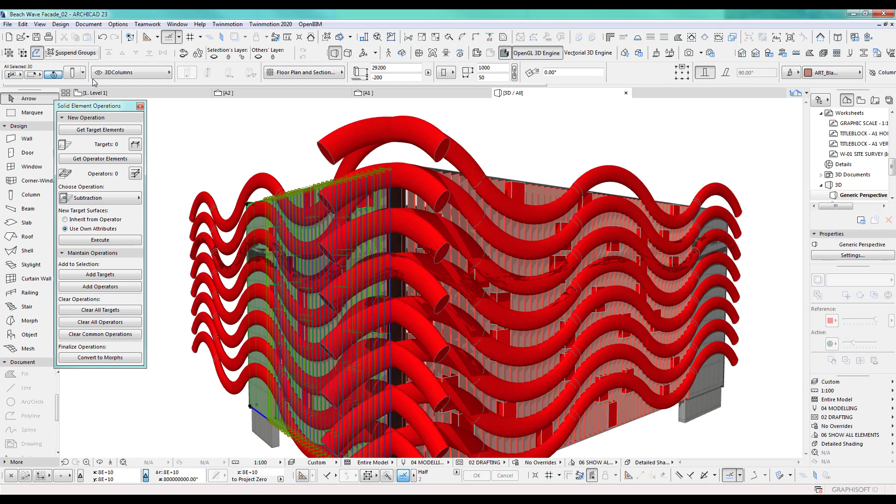Okay, great. Let's open the solid element operation. Target element will be in this wall, the blades. Make sure you've got the group not suspended, so it selects all the blades - this blade and this wall. So that's the target.

As these are the only morph, I could probably go here, morph, select all - that should do it, yeah, that would be much faster. There you go, and that's the operator element. I do subtraction and execute.

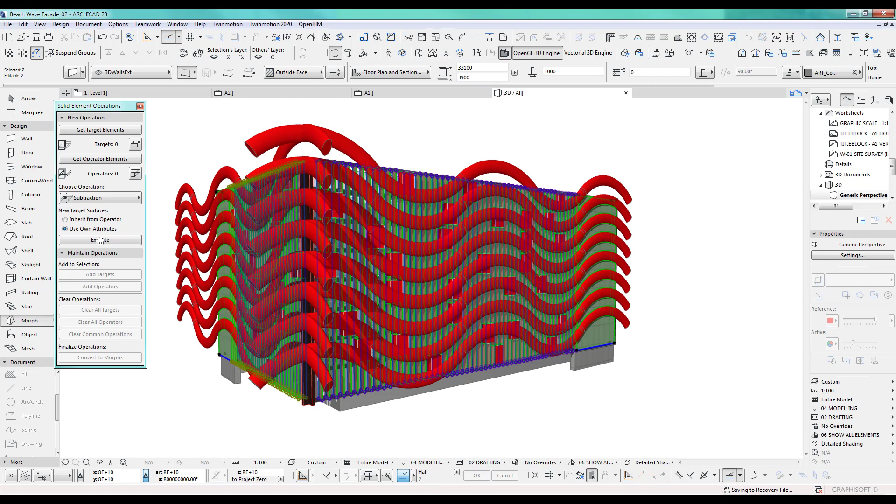All right, deselect, and I want to turn off now this element here, the cutting elements, and we'll see if that worked. Yeah, it's looking good. All right, let's go back to my 2D and make sure I've got the right layer combination, and I can show you the result.

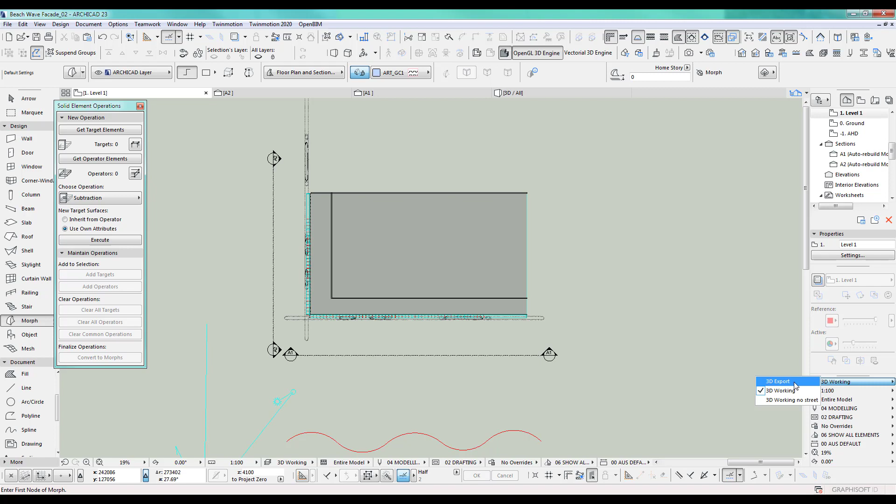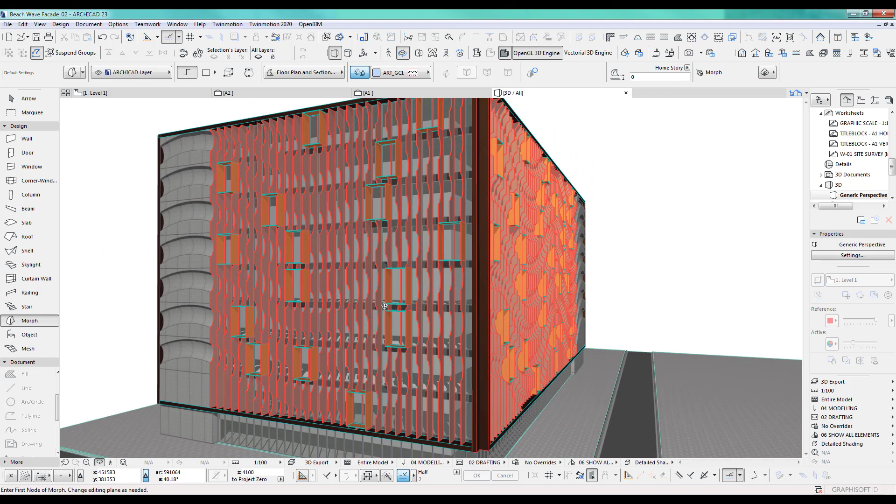Export 3D. Turn this one off. Yes, that is pretty cool. Look at that effect we get here. See all the wave effects, including the concrete. And as you can see, it's still nicely framed in.

So before I go - that's the reason I did this separate, adding those blades on a separate layer so they won't be cut. You can cut them if you want to, I just didn't want to cut them.